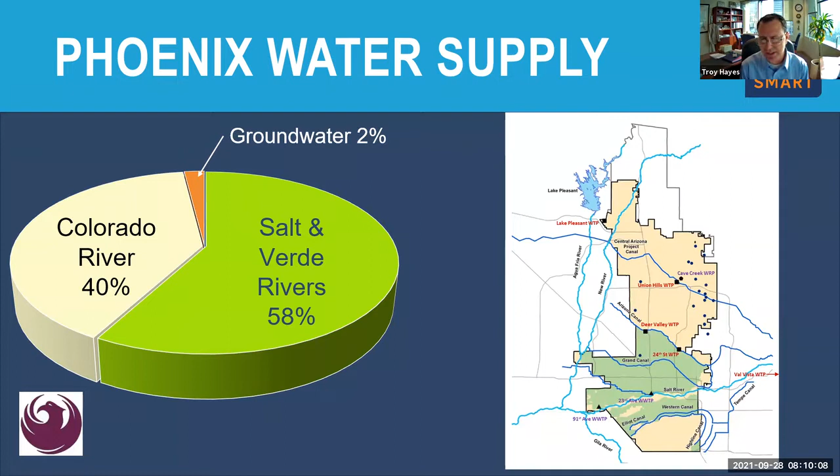As you can see here, most of Phoenix's water comes from the Salt and Verde River system, which over on the right-hand side is generally sent to the area of town that we call on-project. So that's the area there in the green. The rest, in the light tan, is served primarily with Colorado River water or other water supplies that we have that aren't associated with Salt River Project. And I'll explain those as we go forward too.

So as I said, Phoenix receives most of its surface water from the Salt and Verde River system, as we are members of the Salt River Project. But one of the limitations of the Salt River Project water is it's limited to on-project lands. So for the city of Phoenix, that means south of the Arizona Canal. The Arizona Canal goes through Phoenix by the Biltmore up towards the Metro Center area, but it stretches all the way from out in Mesa all the way out to Glendale and Peoria.

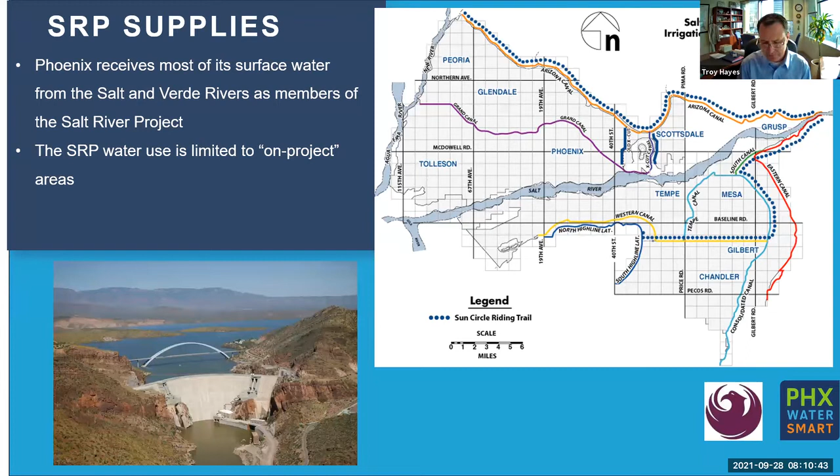So one of the things that we've done, since we've known shortage is around the corner, starting in the 1950s, Phoenix developed other water associated with the Verde River called gate water, in which we invested in infrastructure, putting gates on top of the dam, where we can utilize that water for demands outside of the project area. That was followed up in the 1990s with a project to add new conservation space on the Salt River. So again, adding additional space on the existing dams that would give us water on both the Salt and the Verde River systems that could be utilized off project. And those waters we will use during shortage.

This is generally describing our Colorado River system. The water is shipped in from the Colorado River, as everybody knows, through the Central Arizona Project. The first water treatment plant, the Union Hills Water Treatment Plant, came online in 1986. That was the first treatment plant in Arizona to treat Colorado River water. That was followed by our Lake Pleasant Water Treatment Plant, which gets water off of the Colorado system and came online in 2007.

The Lake Pleasant Water Treatment Plant has a treatment capacity of about 80 million gallons a day. And it was anticipated with all the growth that was going to happen up there in the 2006-07 timeframe. As we all know, that didn't transpire, and the recession slowed growth up in that area. The Union Hills Water Treatment Plant is a 160 MGD plant, and it's the largest water treatment plant treating Colorado River water.

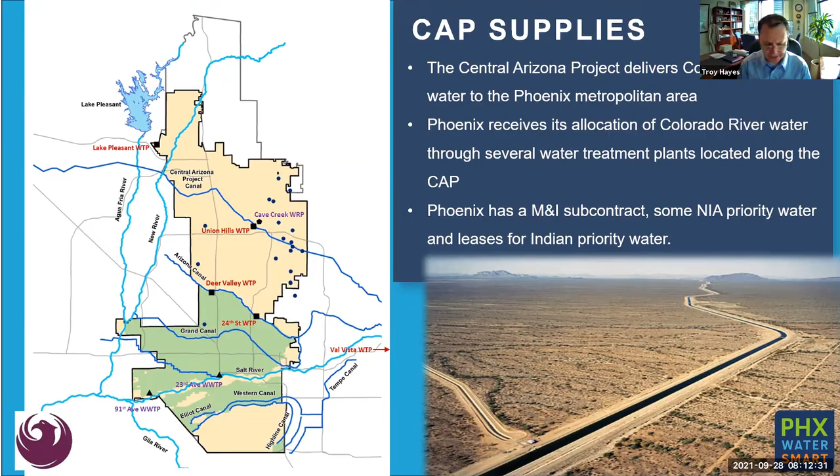The snowpack above Lake Powell, the lake that feeds into Lake Mead, peaked in late March, as it usually does, but it was about 90% of average. But that generated an alarmingly low volume of inflow into Lake Powell, due to what we speculate is the drought, basically soaking into the soil and not really coming down. So that was about 32% of normal runoff.

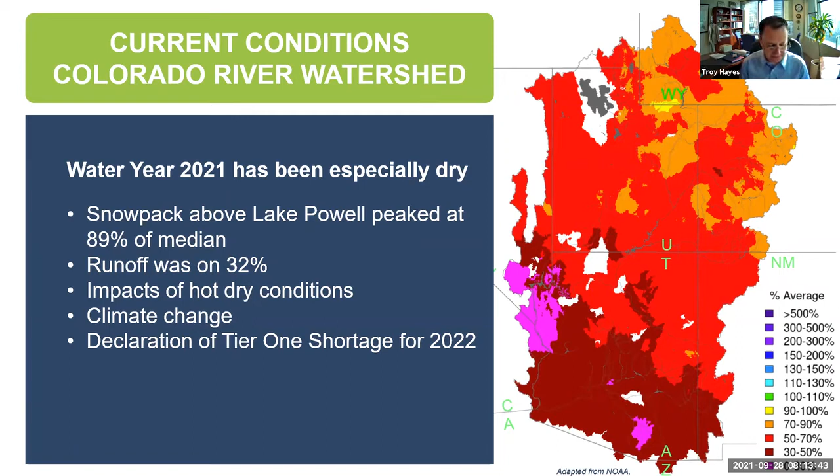And so even though we were about 90% of normal up in the area, what we actually got coming down to use was about 32%. And that's really a result of increasing heat in our watershed, drying out the soils and the amount of water that's yielded from a typical season. And all those were contributing factors really pushing us into the Tier 1 shortage that's coming here next year.

A few weeks ago, the Bureau of Reclamation declared a shortage on the Colorado River for 2022, because it's anticipated off of their water models that Lake Mead would go below the elevation of 1075. This is the first time in history that we've actually gone below this level in the lake. It was anticipated a few years ago that was a possibility, and you can see on there they're actually estimating a level of around 1060 or so within the lake.

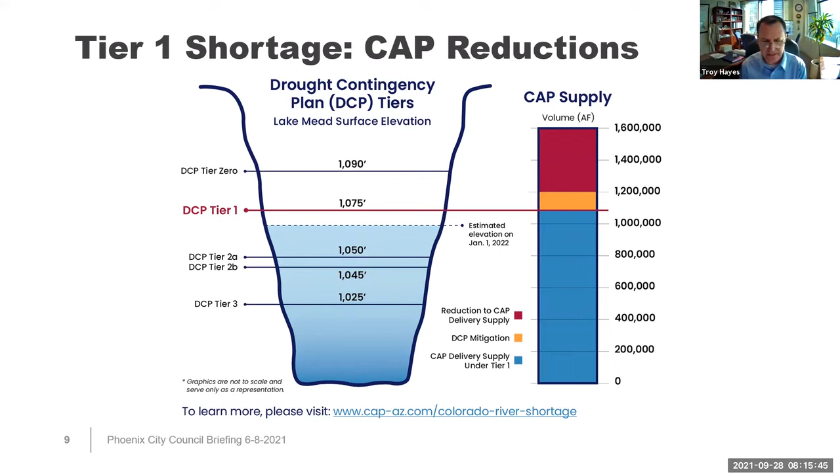So what does that mean under a tier 1 shortage? A tier 1 shortage would cut our supplies from 186,000 acre feet to about 183,000 acre feet. So basically just giving us a small haircut of losing about 3,000 acre feet. And as I said on the previous slide, what we normally use to serve our customers is about 125,000 acre feet of water. So you can see the tier 1 shortage really didn't impact Phoenix, and it only impacted the amount of water that we can store underground. So we didn't really see a need to do any messaging other than some education to our customers.

As I mentioned before, there's the tier 2A and the tier 2B at the different levels, but the reality is the city of Phoenix really isn't affected until you get to tier 3. So under a tier 3 shortage, which is the most severe shortage, Phoenix would be reduced to about 133,000 acre feet. Under that scenario, Phoenix would then rely upon the Salt and Verde River water sources that I spoke about earlier. But it's also important to know that under the drought contingency plan, for all the tiers prior to this, the municipal customers would be mitigated. So what does that mean? All the water that would be cut, we would get back from the state in paper water and water credits that we could utilize.

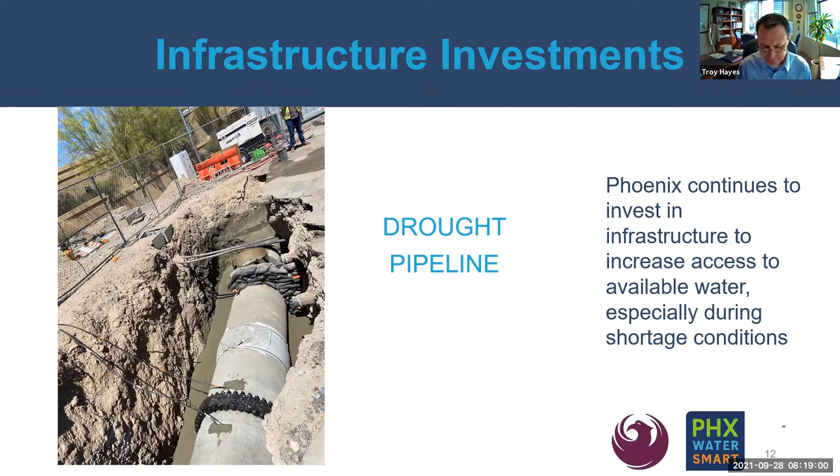So our system is bifurcated, and what that means is that, when it was designed and as it evolved, it became two pieces. We had the Salt and the Verde River system there in the green, and that system was really developed starting back in the 1950s when we built water treatment plants with Carollo engineers at the 24th Street water treatment plant, and then followed that up in the late 50s, early 60s with the Deer Valley water treatment plant. And then, as I said earlier, the Union Hills water treatment plant.

And so there was some connectivity between the two sides, but really not of any level that we would need to be able to move that. The issue was if you go far enough into the drought, it really put into question how we would serve the area in tan, which holds approximately 400,000 people that would receive Colorado River system water. And what it really lacked was the ability to move the water.

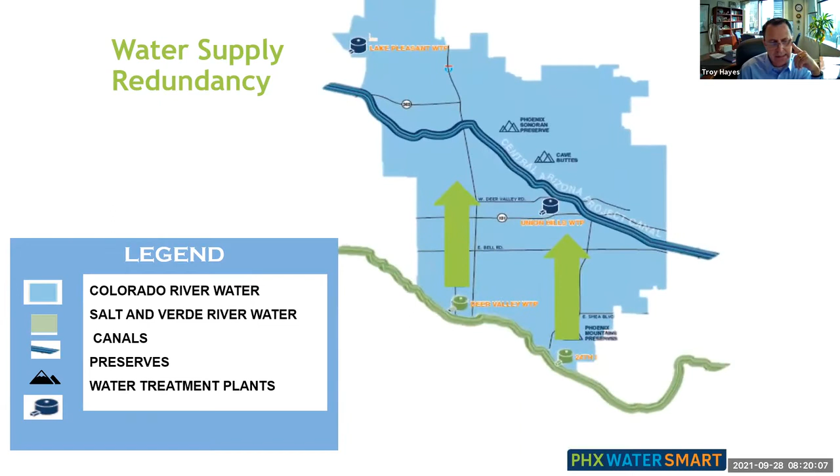And so, as I said, what we came up with is a large pipeline and pump station coming out of the 24th Street water treatment plant, as well as the Deer Valley water treatment plant. That infrastructure included a 75 MGD pump station at the 24th Street plant, a 66-inch PCCP line that goes from the 24th Street plant up to about 32nd Street and Bell.

The infrastructure that we have up in that area around Bell would really allow us to move water where we needed it to go. We had an existing 48-inch pipeline that tied the two together. And so the combination of rehabilitating the 48-inch pipeline and putting in a new 66-inch pipeline really gave us the ability to move large amounts of water.

The other one we have is a pump station at the Deer Valley water treatment plant currently. That size was adequate. That was about a 30 MGD pump station, but there was a bottleneck up between Thunderbird and Greenway. That pipeline needed to get upgraded to a 42-inch.

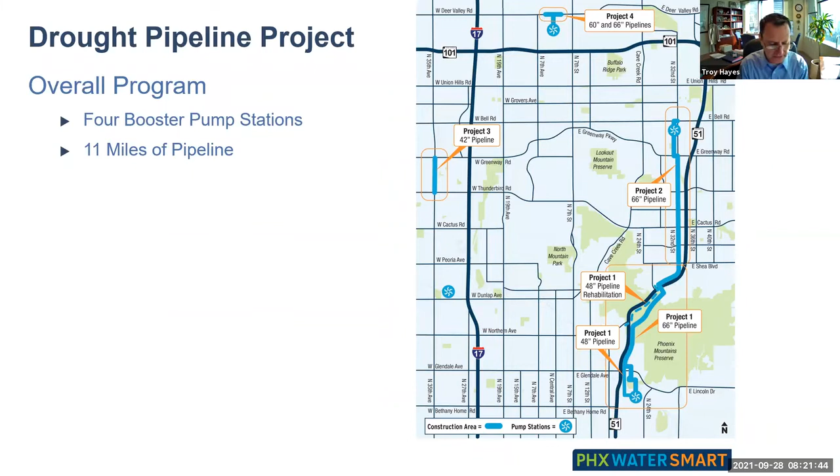We also had a pump station up at Deer Valley Road and Central Avenue that allowed us to move water east and west. And associated with all of these pump stations, there are large pressure reducing stations that would allow us to move water the opposite direction. As I said, it would really give us a lot of operational flexibility to move water wherever and whenever we needed to, whichever way in the town that we needed to go.

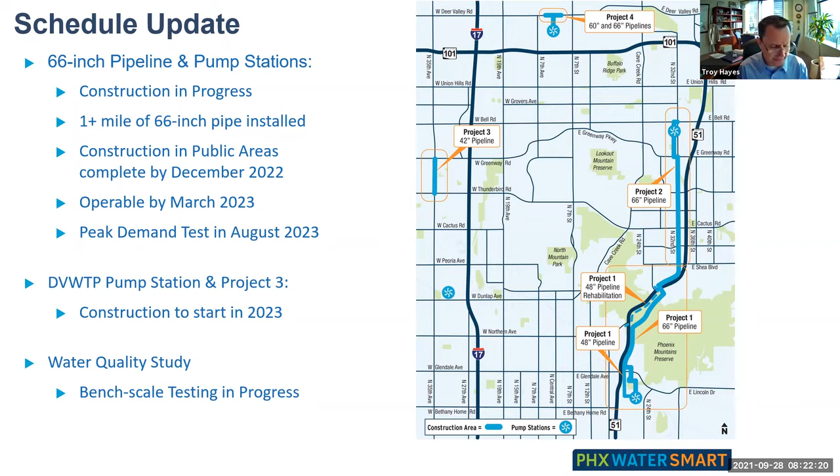Currently, we're on schedule to complete all of the construction associated with the drought infrastructure by early 2023. That includes the large transmission mains, as well as the pump stations. The only one that's lagging a little bit is the Deer Valley side. Like I said, it's already there. It was an upgrade of the system. That project is scheduled to start in early 2023. So well ahead of any issues where we think we would have to utilize large volumes of water associated with the Salt and the Verde rivers.

As you've driven up the 51 going north, you'll see a 66-inch pipeline sitting along the preserve there. That was a lot of work that we had to do to get community buy-in, as well as with those that had real concerns about us putting in infrastructure up the freeway. So as you drive that way, you'll see about 11 miles of 66-inch pipeline sitting along the side of the road. Construction is going well.

We have split that into two phases. South of Shea would be one project, and then north of Shea, up 32nd Street to Bell, is a second project. The southern part was designed by Black and Veatch, and I believe the northern part was by Stanley. And so it allowed us to do simultaneous designs and construction in order to meet the timelines that we had.

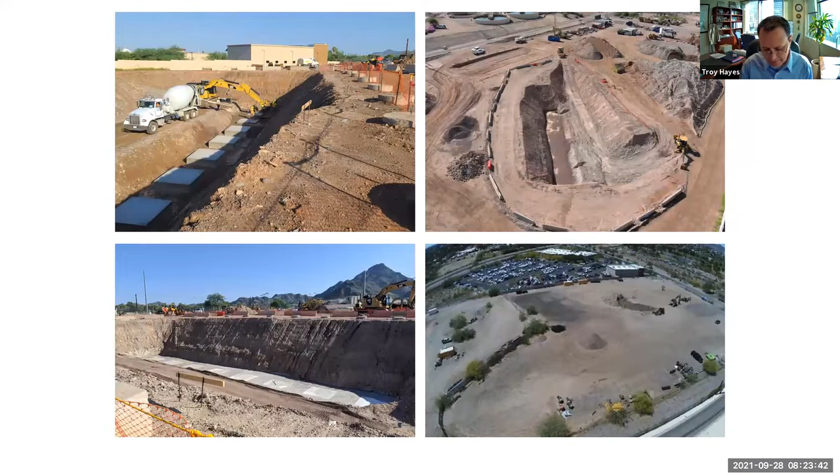That's in some land that we have just west of the treatment plant and, I guess, south of a park that's there. We also did extensive water quality testing. One of the lessons that Phoenix learned a long time ago, mostly from challenges that the city of Tucson has, is if you are changing the water source or changing directions of the water source, there's extensive water quality testing

that needs to happen. We're doing this in conjunction with Carollo Engineers, in which we are pulling out pipe segments from the northern sections of town and putting Salt and Verde River water through it. Luckily, before 1986, the portions just north of the Arizona Canal were all served by the Salt and Verde Rivers. It's not until the late 80s and early 90s that we actually switched over to Colorado River.

So what we're finding with these studies and the analysis that we've done is that we shouldn't really have any water quality concerns associated with changing the water sources. And as we go into cycles where this becomes a little bit more normal, the customers really shouldn't see any issues going forward.

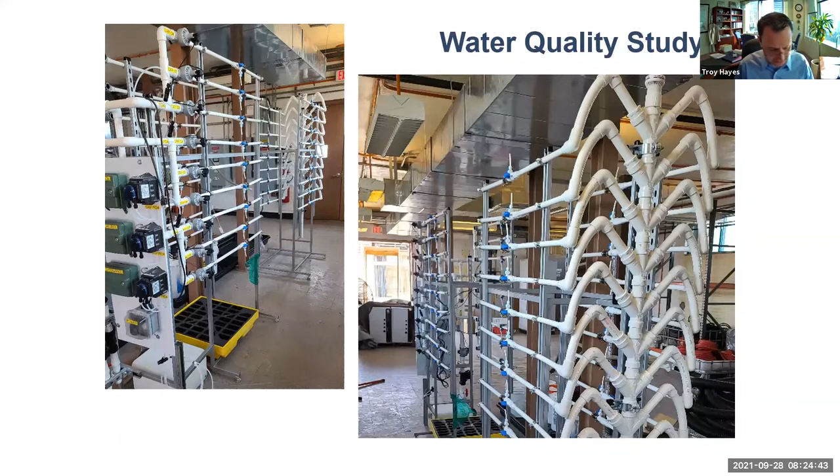Phoenix also has been pushing water conservation. The mayor at the time, Thelda Williams, enacted a water conservation ad hoc committee, which came up with a lot of recommendations that we are implementing to basically put conservation in the forethought of everybody's view. And what you've seen from Phoenix over the past 3 years is a lot of advertising and a lot of pushing conservation messages. And what we've seen over time is our customers really adapting and embracing a desert lifestyle.